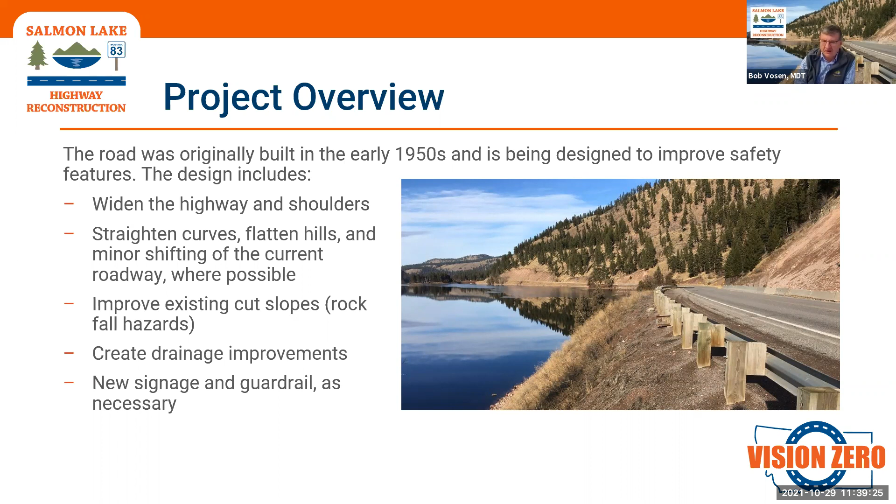So I'm going to let Erik speak to us a little bit about the CMGC process and what the benefits of that are. So, Erik?

Thanks, Bob. A few years ago, MDT was approved by the Montana legislature to conduct a pilot program with four projects using the CMGC delivery method. This method utilizes a separate design consultant and a contractor to help design the project from the start of the pre-construction phase. So MDT on this project is working with the design consultant HDR and a contractor, Kiewit Infrastructure Company, for the design and the construction of this project.

As part of that effort, during the pre-construction phase, Kiewit will develop a construction staging plan that preserves access and promotes mobility for local residents and the traveling public. There's a number of advantages to CMGC, but one of the big ones for area stakeholders is that the contractor hears firsthand about what community concerns will be during construction. So for example, they can concentrate on keeping the road open for access by emergency response vehicles. So that's just a quick summary of that CMGC process. And with that, I will turn it over to Lisa Fischer.

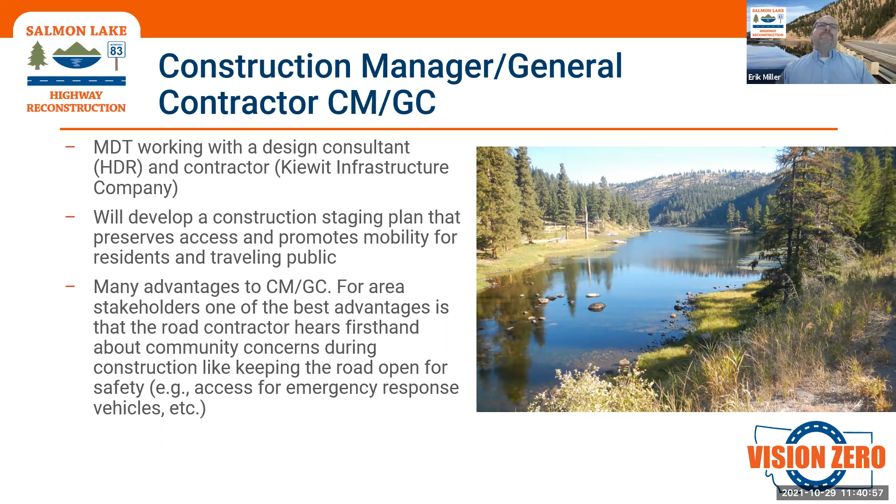So generally, the proposed roadway follows the existing road with some improvements to curves to meet current design standards, making them less steep and safer to navigate. The proposed makeup or typical section includes two 12-foot travel lanes and 3 to 4 foot shoulders on both sides. The current design has been able to accommodate 4-foot shoulders for the majority of the project limits, and we will continue to try to accommodate that 4-foot shoulder wherever possible as the design moves towards final design.

As shown in the figures on this screen, this can be a challenging geographic location. In many areas, the highway is constrained by that steep mountain slope on one side and then Salmon Lake on the other, which really makes it difficult to add width to the roadway.

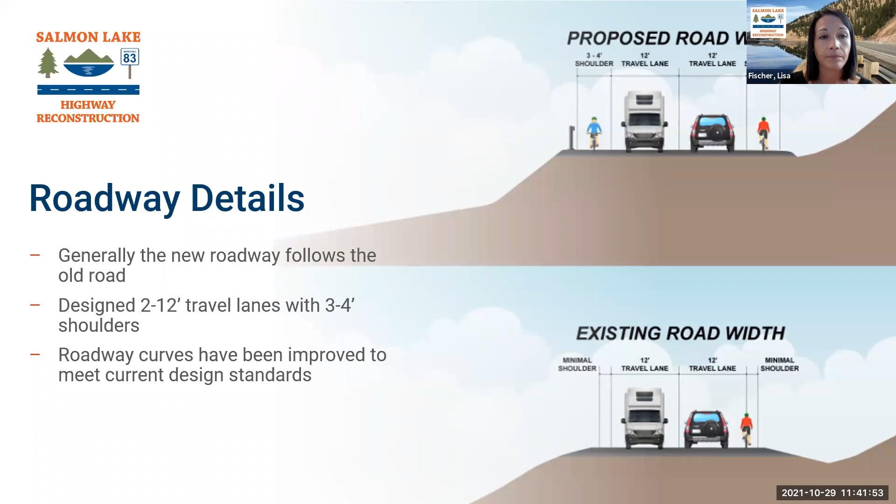The intersection with Woodworth Road is located almost in the middle of the project limits, and it will be realigned to meet up with the highway at a more perpendicular angle, which helps improve sight distance for drivers stopped at or on Woodworth Road. Instead of having to turn back to see if traffic is coming, oncoming traffic will be seen in a more natural left to right line of sight.

A traffic study was also completed at this intersection, and at this time, analysis indicates that turn lanes will not be needed on Woodworth or on MT83.

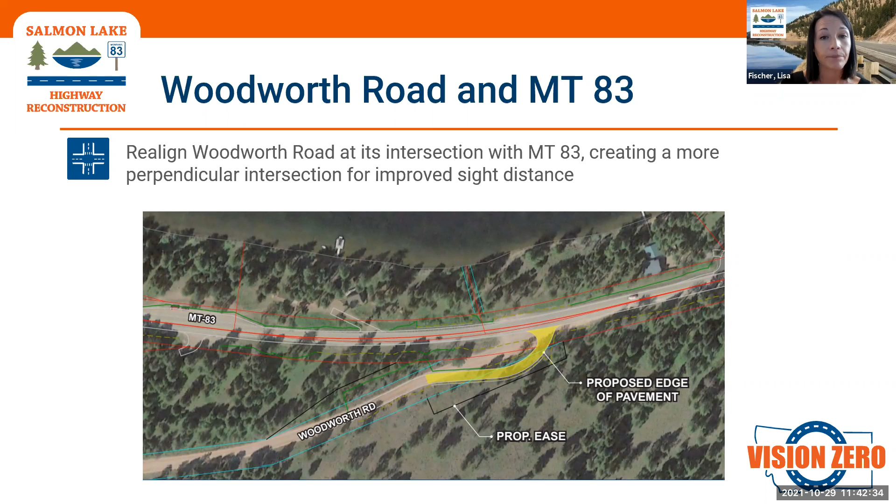There are 10 pullouts located along the project limits, and the current design maintains all of them. The new pullouts are designed to be similar in size and extend 24 feet past the shoulder stripe. The picture here is at a unique pullout location near the north end of the project, connecting the pullout with an existing boat ramp access. The ramp access won't be modified as part of the project, but the current configuration of the pullout will be maintained.

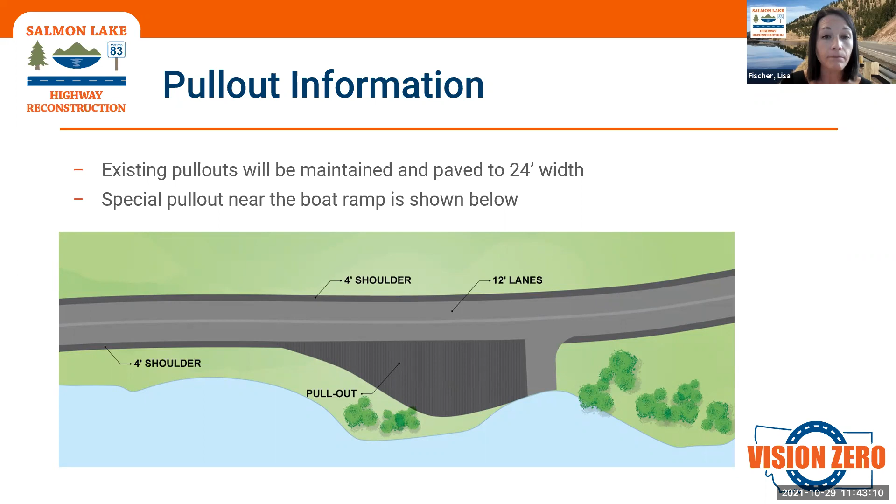Now onto the cut slopes. There are 3 major cut slopes located along the roadway within the project limits. The project team evaluated a number of different slope treatments and safety improvements within these locations to help keep rocks off the road. The proposed catchment ditch is shown here, and this 10-foot ditch will provide storage space for falling rock and debris to collect and keep objects off the road.

In some locations, a rockfall fence is recommended to sit on top of the new concrete barrier, and that's really just to help catch additional material if it bounces.

That 10-foot catchment ditch will also provide MDT's maintenance teams easy access, so they can come through and clean out that debris whenever it's needed. And lastly, this kind of configuration is still being developed, so the exact catchment ditch layout and materials will continue to be evaluated as we move towards final design.

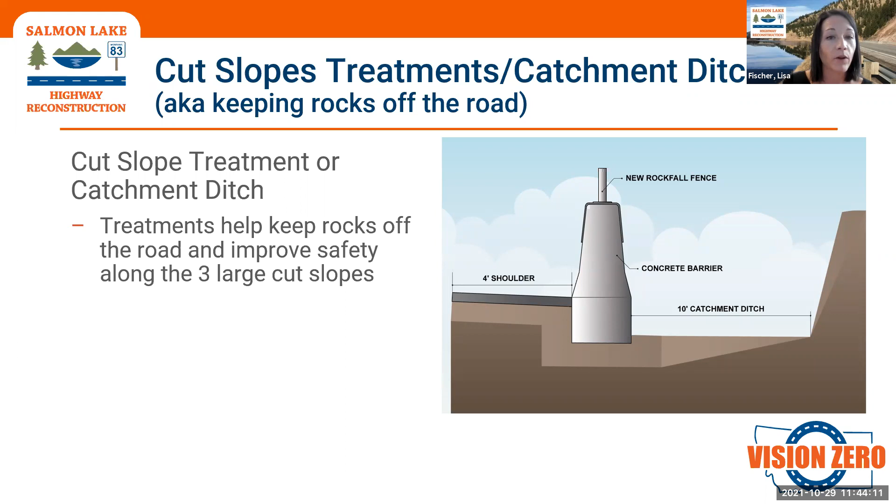In order to accommodate those 3 to 4 foot shoulders we discussed earlier, roadway widening towards the lakeside, towards Salmon Lake, was required. The current design includes 13 locations where retaining walls will be used to help provide that additional roadway width. These walls will be visible from the lake, and we provided a few photos here from past projects to give you an idea of what this type of wall might look like.

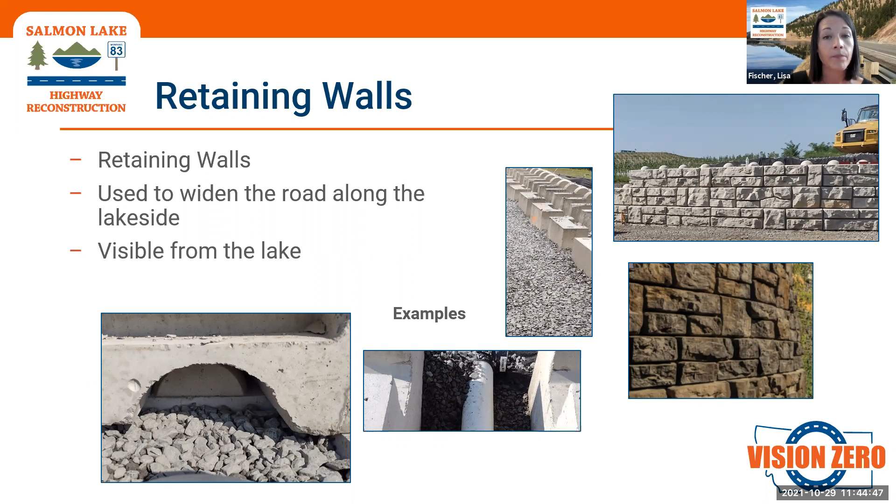A few other details worth noting for this project include the culvert replacement at Fish Creek. This large culvert will be increased to a 5-foot by 5-foot box culvert to help provide fish passage.

The project will also include vegetation removal along the roadway to improve sight distance and help drivers see wildlife approaching the road a little bit sooner. And again, those wider shoulders on the road will help accommodate bicyclists through this recreational corridor.

Also, roadside ditches will be flattened and increased where possible to improve safety and accommodate additional storage for rocks, debris, and snow, knowing that this area of the highway can be challenging due to the geographic location and steep slopes we talked about earlier. And lastly, the current construction cost is estimated at $24 million.

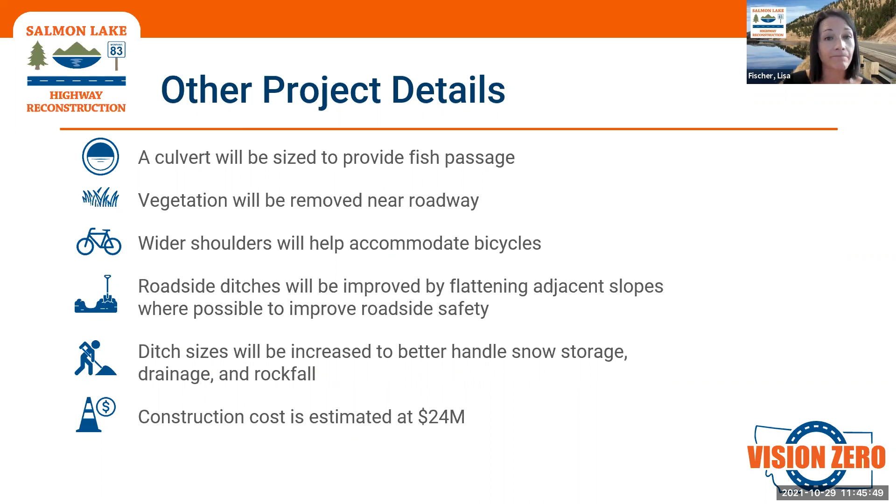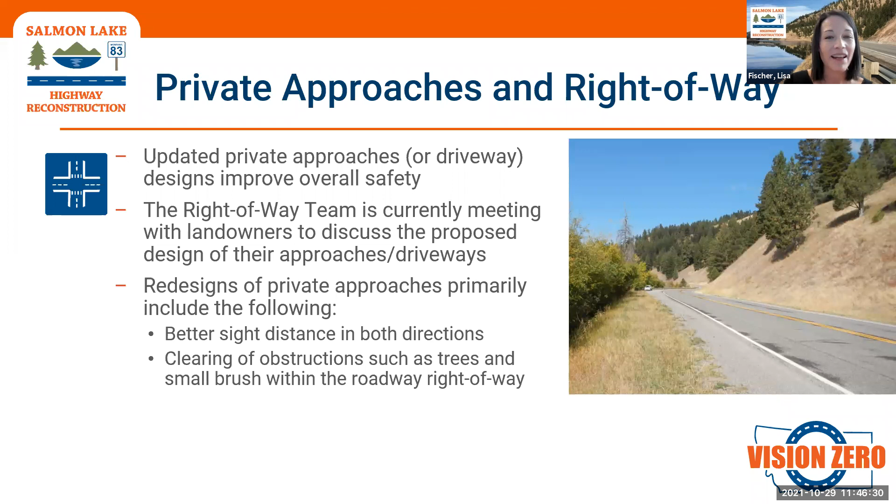And I think that's it for me. So I'm going to hand it over to Mike George, and he's going to discuss the project schedule.

Hi, again, Mike George with Kiewit. I'm on the construction side as the construction manager.

We'll start construction early 2023. In spring and summer 2022, there will be some tree and vegetation removal, as Lisa mentioned, to get trees and stuff out of the way prior to the major construction phase. Major work really starts early 2023, as soon as the weather cooperates and we can get out there and get some real work done. We'll finish the majority of the roadway widening, construction walls, and drainage in 2023. Then there will be a few things we'll finish up and wrap up in 2024, maybe some finish paving, chip seal, signage, guardrail, things like that.